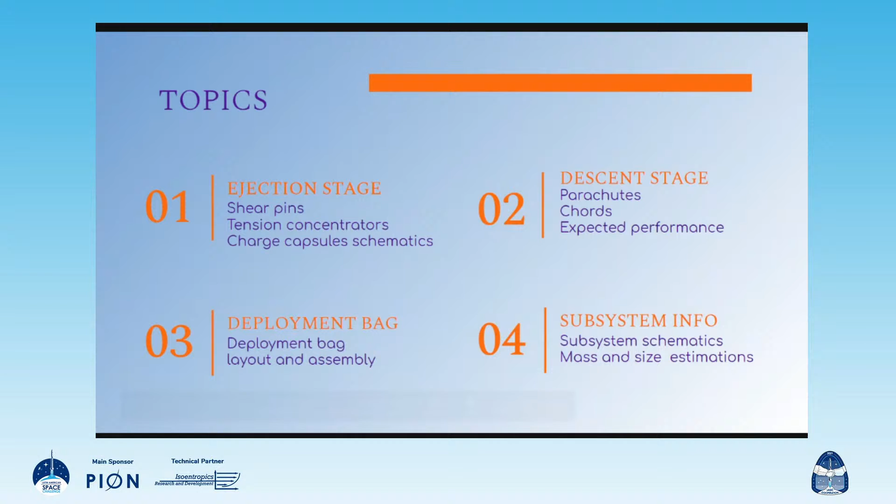I'll be presenting now the work from the recovery subsystem. During this presentation, we are going to take a look at the ejection stage and the sectioning of the rocket, and the descent stage. We're going to see the parachutes and the cords and the expected performance during descent, and some details about the deployment bag we're going to use for the parachute, its layout and assembly, how it's going to work, and some general subsystem information and estimations.

First, for the ejection stage, the shear pins have been dimensioned considering how much force they need to withstand during flight. This is the admissible force that they would withstand for the shear pins placed in the nose cone and the shear pins placed in the propulsion coupler. For the nose cone, we have 5 shear pins of 4 millimeters diameter, giving us a safety factor of 1.73, and this demands a black powder charge of 6 grams to expel the nose cone.

For the propulsion coupler, we will use 4 shear pins of 4 millimeters diameter, giving us a safety factor of 2.22, and this demands a black powder charge of 11 grams for the second sectioning of the rocket.

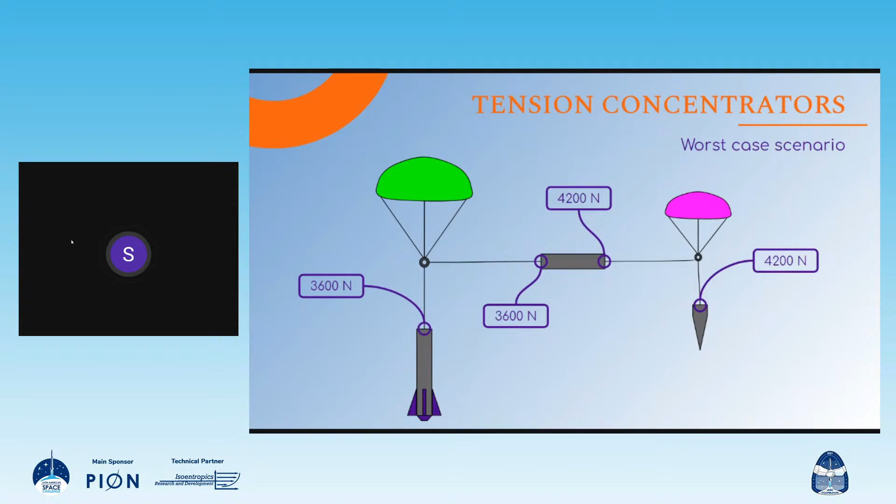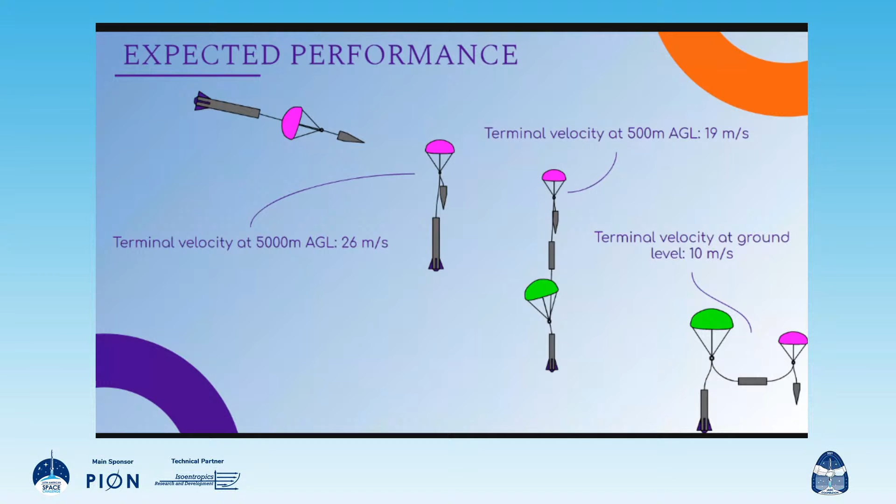This was designed to stand up to 50 kilograms of weight. And here you can see how the system behaves if we decrease the weight a little bit.

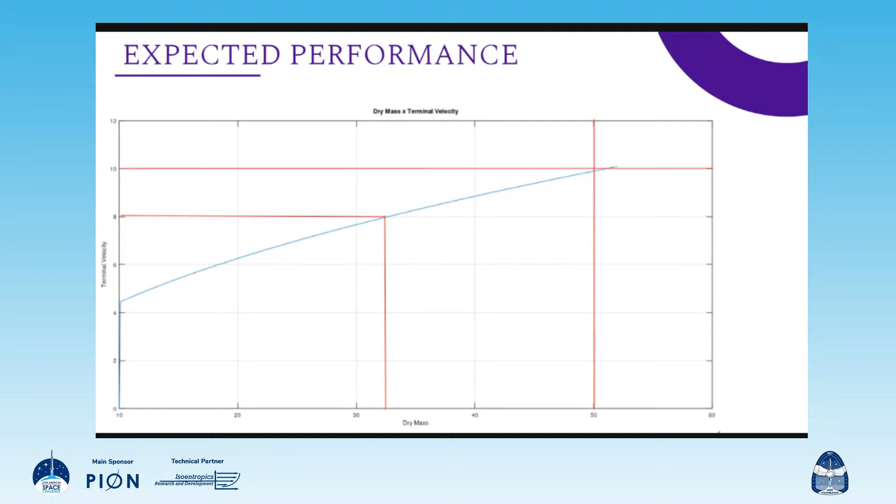So Structures is working on the mass optimization. And here you can see how the recovery subsystem would behave given this mass optimization.

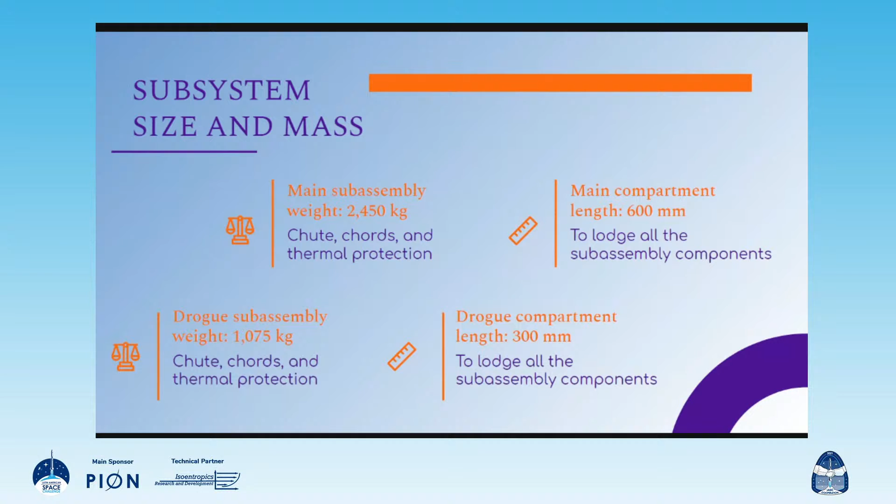These are the information that I have for today. Thank you very much.

Okay, thank you very much, Sarah. Okay guys, now Sarah, you present everything. Is it done? Yes. So now we have a few considerations from the last part. Am I good to go? We are good to go.

So you have a complete subsystem with every part that we wanted to put inside our rocket. The drogue, the main parachute, we have a mid section where the avionics for the recovery system will be placed.

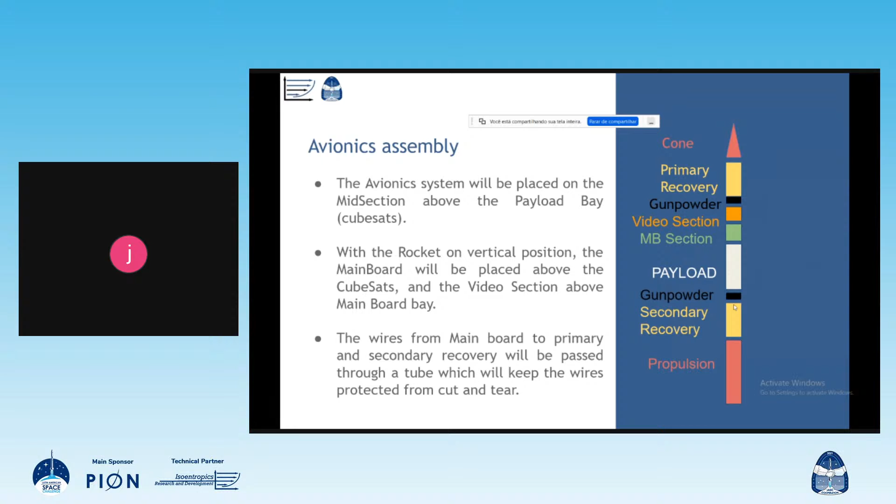I will start by presenting where the avionics will be placed on the rocket. So from ground to top, we have the engine in the beginning. After that, we have the recovery, the gunpowder charge, and the midsection. In the midsection, you have the payload bay, and after the payload bay, the main board section and the video section, which is our system. Above us, we have the other gunpowder charge to trigger the drogue recovery, and after that the cone.

We are responsible for triggering both recoveries, and to do that we will have wires from our bay to the bottom and upper part of the rocket to trigger the gunpowder charges. Here we have the design of how the rocket looks, and here in transparent material are the midsection, and here the avionics bay. Now, in this picture, we can see the avionics bay with more details.

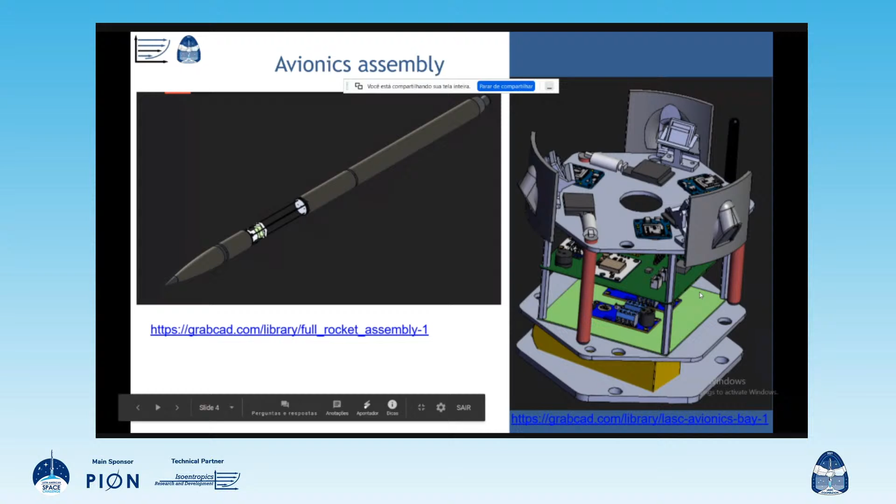In the upper plate, we have the video recording section responsible for recording and broadcasting live video from the rocket. In the middle of the avionics bay, we have the main board section with all the sensors and transmitter modules, and the recovery trigger below the main board. Below everything, we have our batteries to power the system and allow it to complete the missions.

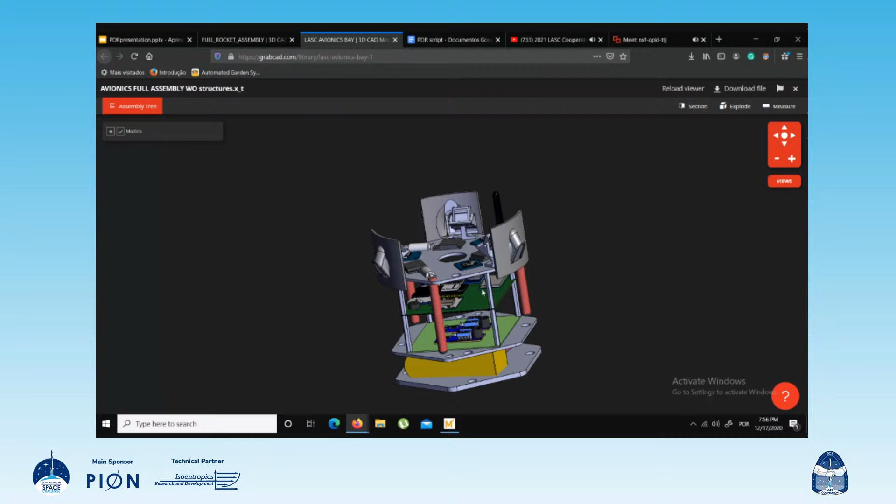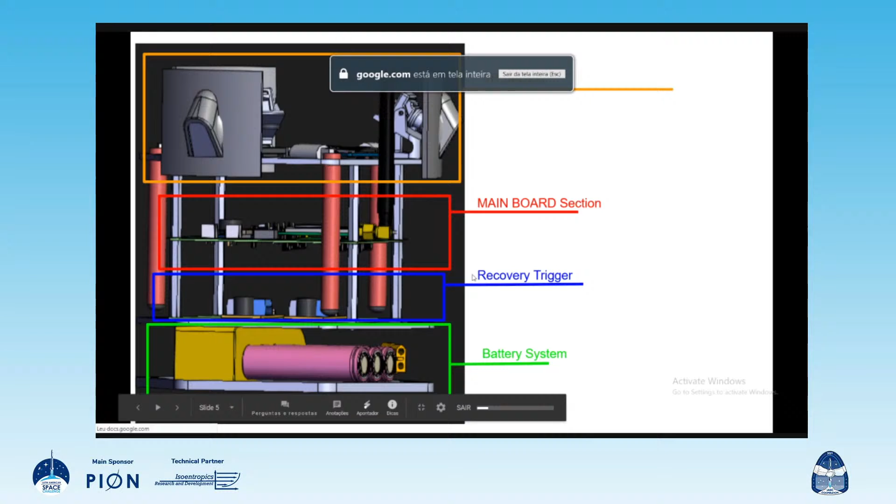This is Roberto. On this slide, we can see the main elements of the video record section, and I will describe each one.

At the right top, we can see the FPV camera responsible for capturing images in HD quality. Below it, we have the DVR device responsible for recording the captured images and converting them to analog format.

At bottom left, we have the omnidirectional antenna, responsible for connecting to the receiver at the ground station. Above it, we have a camera cover responsible for mechanical and thermal protection of the camera.

And finally, at the upper left corner, we have the FPV transmitter, which will operate at 5.8 gigahertz, sending all the images to the receiver at the ground station.

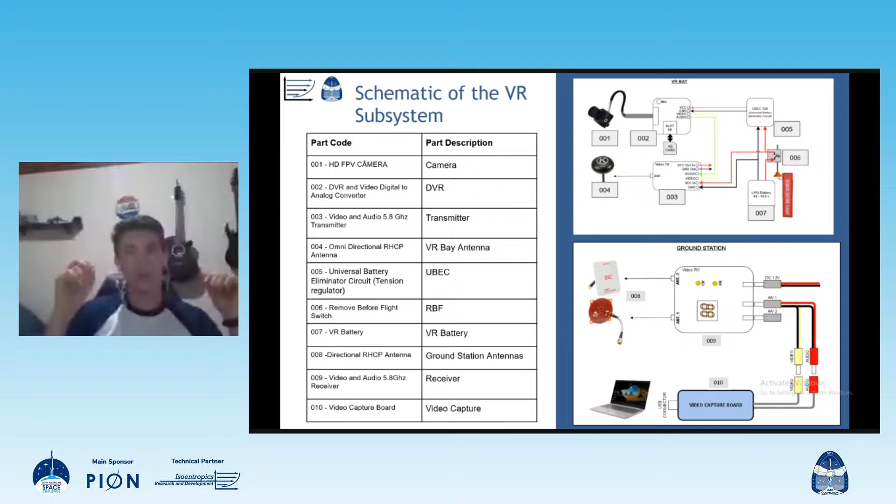And the camera will be connected to this DVR, so we can convert the signal from digital to analog, and also save the video on an SD card.

There will be also the transmitter, which will take the video from this board and use the antenna to send it to the ground station.

In the ground station, we have 2 antennas, one directional and one omnidirectional, and a video receiver responsible for receiving the video, connecting this receiver to a video capture board, and connecting the capture board to a computer. We are able to livestream our flight to the world on YouTube.

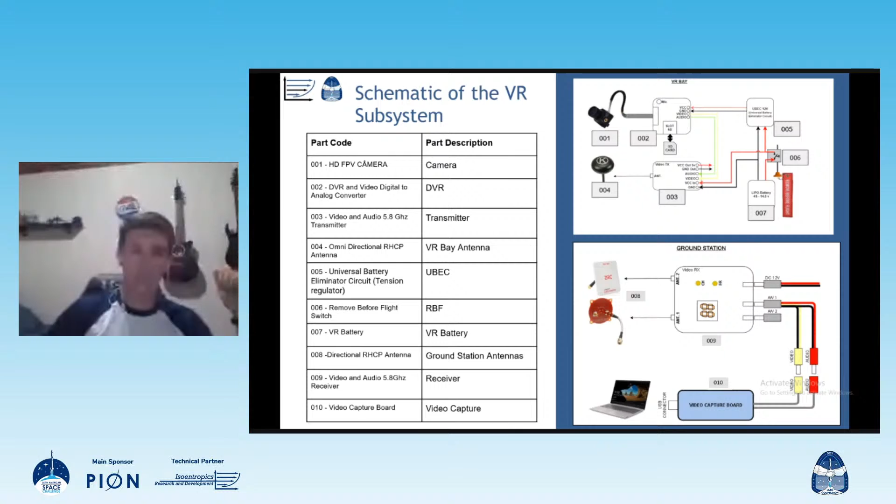So with that, we are able to see the ground and the horizon line during the entire flight. This is all I had to say. Thank you for listening.

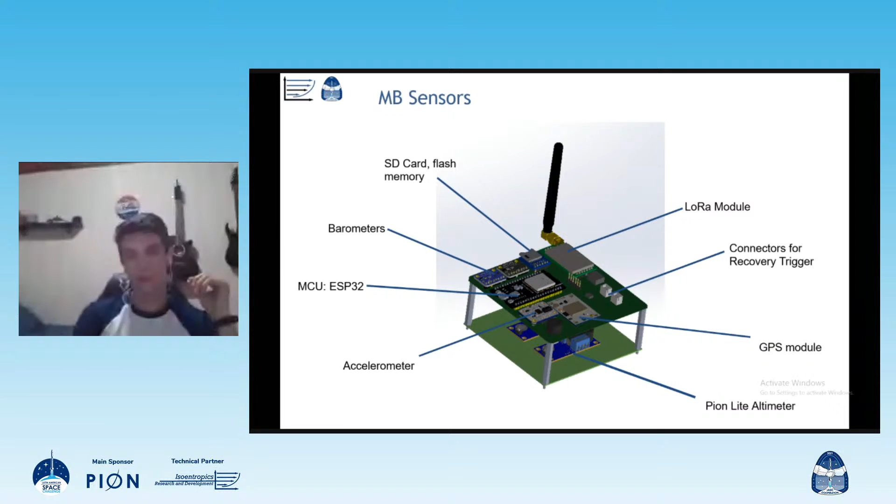Good evening. Now let's talk about the main board sensors and how the sensors are distributed on the board. In the image, we have a 3D representation of how the sensors will look on the plate.

On the first floor, we have the Pion altimeter, and on the second floor we have all the components chosen for the main board.

Something important to say is about the distribution of the components. This importance depends on the functions. For example, the radio LoRa module is in the corner because of the antenna, and the connections for the recovery trigger are also in the corner because they go outside the plate.

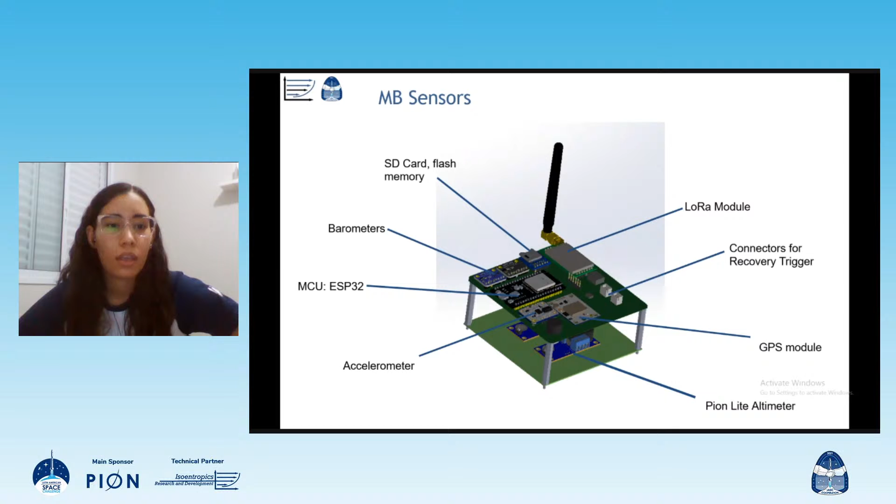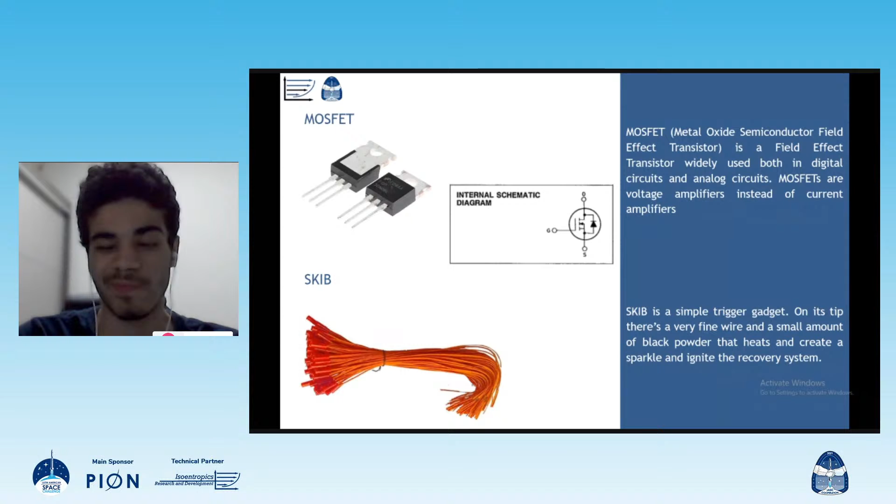The MOSFET is a transistor, a field effect transistor, different from the BJTs. The BJTs are current boosters, while the MOSFETs are voltage enhancers, voltage amplifiers. It works when you apply a voltage signal in the gate. There's the gate, the drain, and the source. When you apply voltage in the gate bigger than the threshold, it works like a closed switch between drain and source, so current can go through and apply voltage between drain and source.

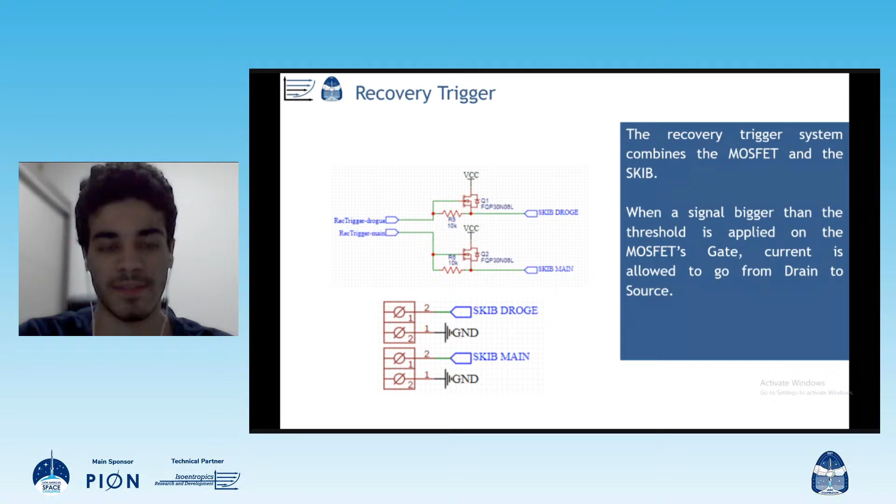Another image is from the connectors. We have the SKIB drogue and the SKIB main connected to the ground, which is where we'll connect the SKIBs that go to the recovery system. Now I'll pass it, you can pass the slide, and Lucas will present.

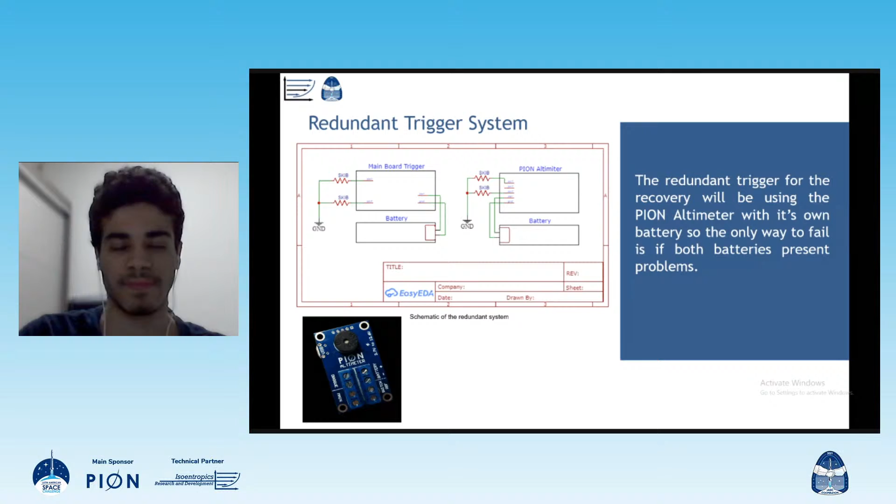As Rogério said, we have a redundant trigger system explained by this schematic on screen. Basically, we have a separate battery and a separate everything from the main trigger. So if anything fails in the main trigger, we have a separate one working as the redundant one. So we're basically sure it will trigger when the time comes.

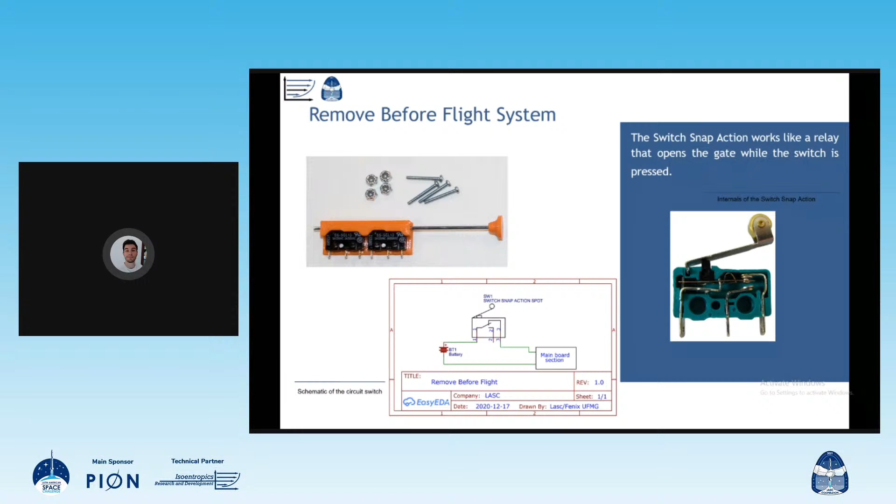Now we have Rodrigo with the next part. Good night everyone, I will talk a bit about the operation we'll do on the day of the launch. About the video, the first thing, when we are ready to go, we will take off the remove before flight key, and then the system will start to capture video and transmit data to the ground station. It will continue like this through the whole flight and during the recovery, and we will only turn off if the battery ends, or if we recover it before the battery ends.

You can pass the slide.

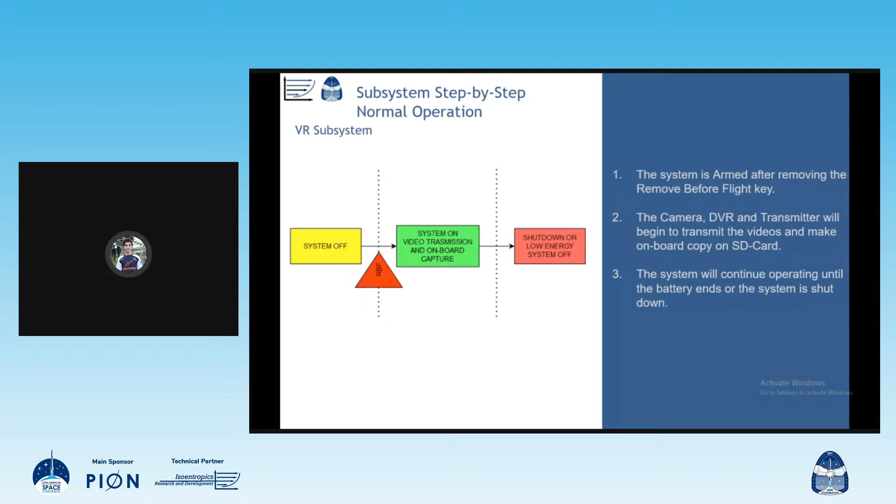Okay, about the main board, it's a little bit more complicated, but it's simple. The first thing, during the integration part, we will turn the system on, and the system will automatically check the sensors, meaning it will read the sensor data and check if it's plausible. It will create an SD file and write and read data to check if it's okay.

The GPS will be sending data if it's working properly. It will be sending data by the LoRa. And yes, we can check LoRa, checking if we are receiving data.

Okay, that's during the integration part. On the launch pad, when we are ready to go, until then the system will be in a low consumption mode to save battery. But when we are ready to go, we will remove the remove-before-flight key, and then the system will be on, which means it will be transmitting altitude, deceleration, and other flight data, and it will be checking for liftoff.

And from this point on, it's fully autonomous. After flight, the system continues on, but it's not checking for apogee or things like that. It will only be sending GPS position to help the recovery. And when we find the rocket, we will shut it down.

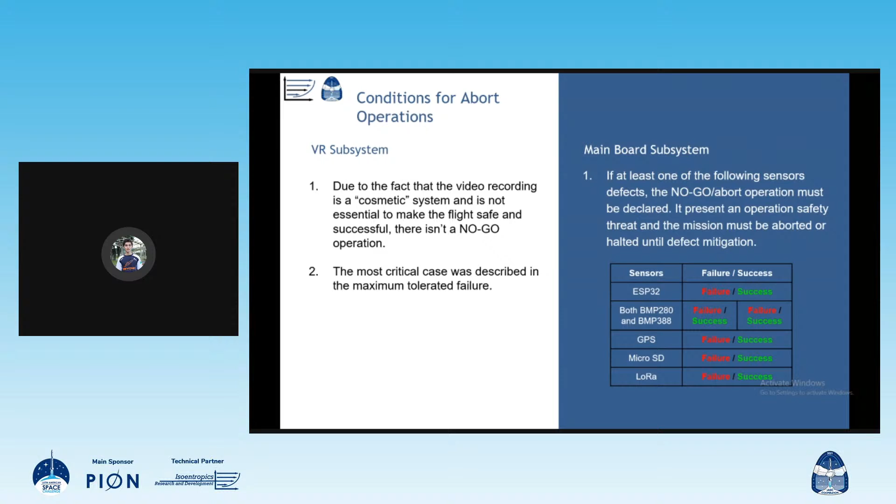And now I will pass the words to João. He will conclude the presentation.

Thanks. Okay, thank you, Rodrigo. Thank you all for presenting. That was our avionics system, the job that we developed during the PDR phase. And now we are open for questions. Thank you all.

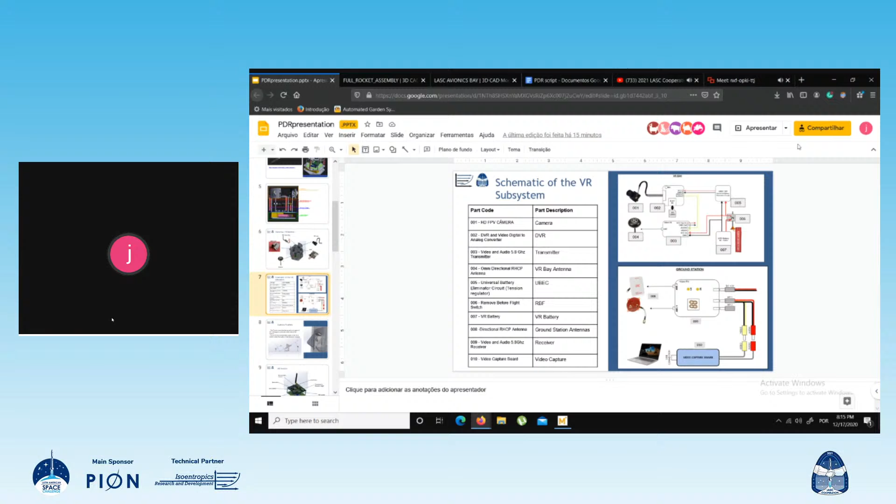About the antennas: on the rocket we'll use omnidirectional antennas. For LoRa on the ground station as well, we made some link budget simulations, and we believe the omnidirectional antennas can handle the data transmission with no problem. But regarding the video, we will assemble omnidirectional antennas on the rocket, while on the ground station, as you can see in that image, we will have a directional antenna that will track the rocket during the flight.

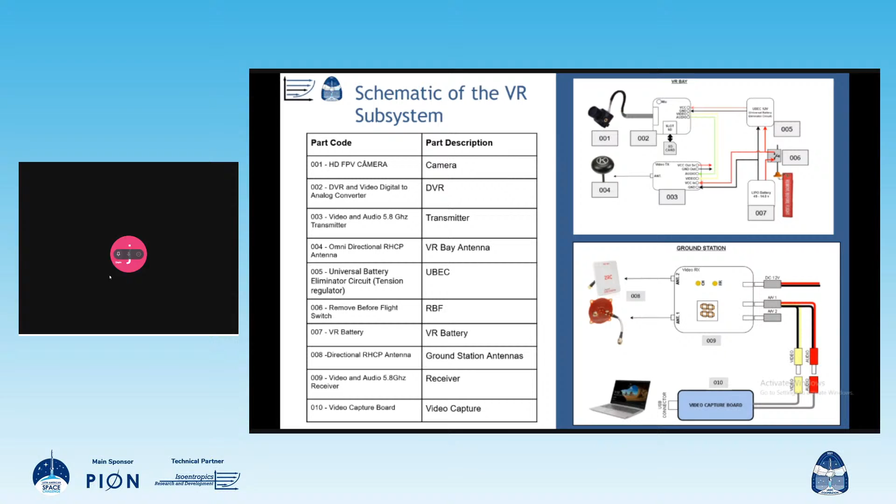Okay, that's really great. This slide you're showing right here really resumes everything of the avionics subsystem, and I think you did a great job here. There's a lot of information about where something is going to be plugged in and everything else. And just one other consideration I have: on this system, you are basically using the remove-before-flight on the batteries, right?

So you can unplug the battery from, when you remove the remove-before-flight system, the system will start to work, will be powered up. The antenna part you already covered. So the other thing is, it will be better for the recovery part of the system to be like this.

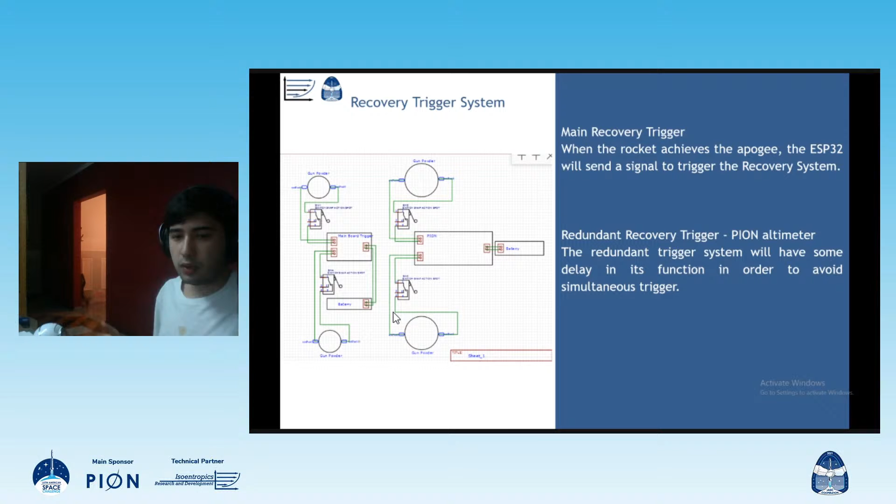One could criticize saying, oh, but in this way you are disconnecting the pyrotechnical charge, and you're right, you are really disconnecting, but the system behind it is energized and could do some damage as well while carrying the rocket from place to place. I think it's better if you do something on the battery as well. But you guys weren't wrong.

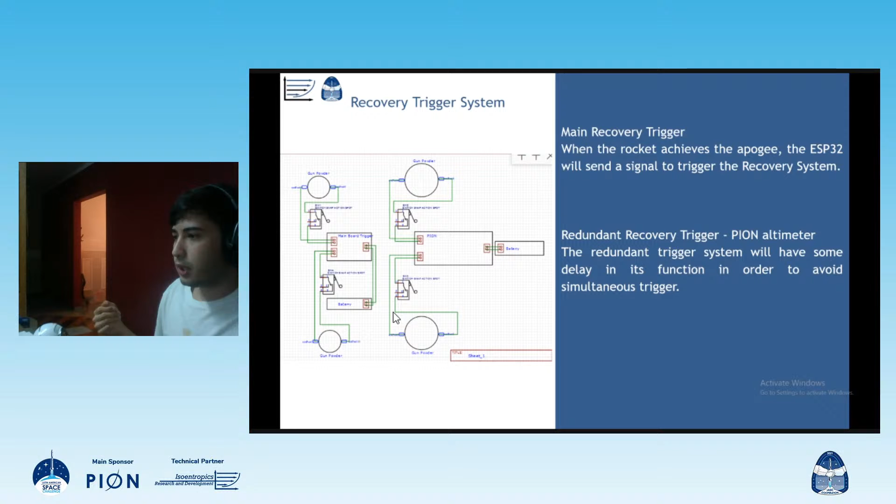It's just that it's more commonly used in rocketry to cut the battery, really unplug the battery from the system. That's the behavior of all the recovery boards, like the PION altimeter, the Stratologger, and other altimeters out there. They really cut the connection between the battery and the other parts of the system, so the system is only powered up when it's in vertical position or something like that.

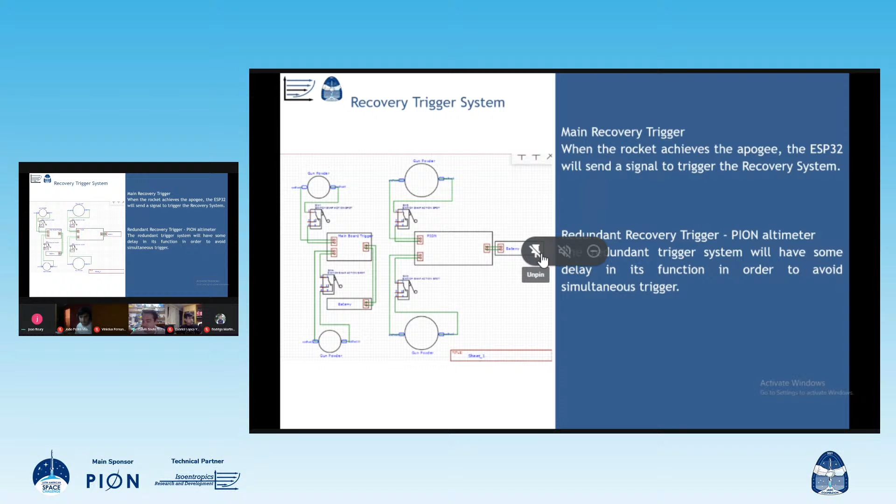And that's it, the other parts are really great. The main board and the battery there, you did a really great job. And yeah, that's really it. Okay, thank you João Pedro for your advice, for your comments. Thank you João for your presentation, for all the team responsible for the recovery system.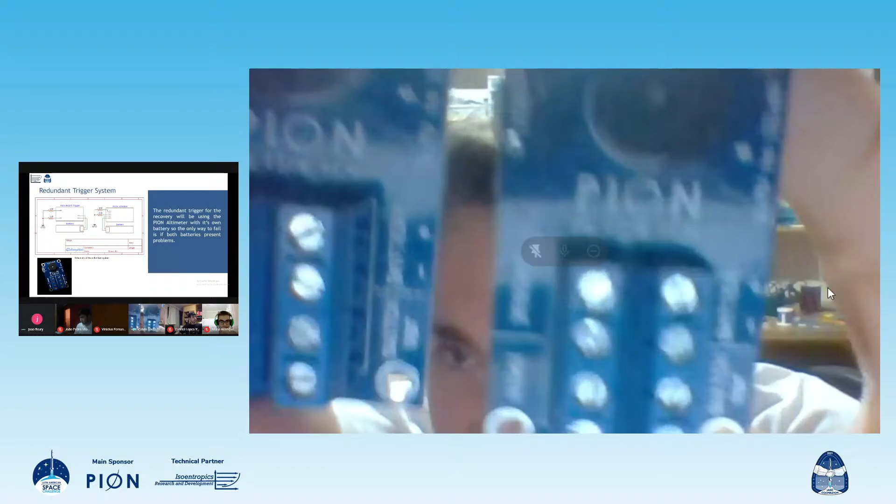I just want to show, I think you guys are working with the PION altimeter, and you guys need to see that. Okay, let me see, we have the PION altimeters here. So probably this is the first time you guys are seeing, we have a lot of altimeters here. So next, you guys will receive this for the project.

Okay, so thank you so much for the presentation. I really liked all the systems, and also I'm very anxious to watch the rocket going through the 5-kilometer apogee with a live stream from the onboard camera. So thank you so much.

That's it, guys, do you have any more words? No comment, that's from my side. Okay Vini, the word is yours.

Let's go to the next system. Congratulations with Avionics, you guys are go for the critical design review in 2021. One step closer.

Okay, thank you very much Calvin. Thank you all. Thank you very much João, and the team. This was a very nice and complete job, as you saw. A lot of engineering going into that.

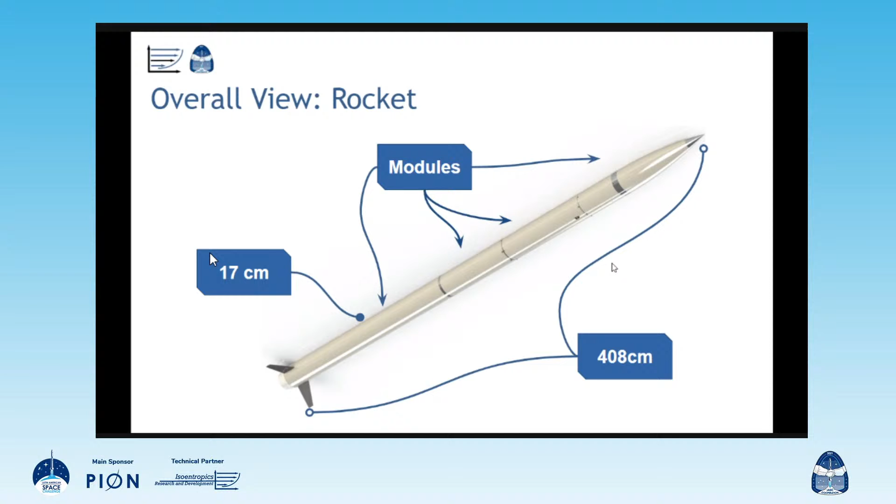To be a little bit more specific, we have 5 modules. The first one is the nose cone, then the drogue section, then the mid section, in which we'll be placing the avionics and the payload, then the main chute section, and finally the motor section.

Now we're going to talk a little bit more about the aerodynamics part of our subsystem. And to tell you guys a little bit more about this, I'm going to call Rafael.

Good night, everyone. I'm Rafael, part of the aerodynamics team for the cooperation program. Let's start our analysis with the expected flight profile for this rocket.

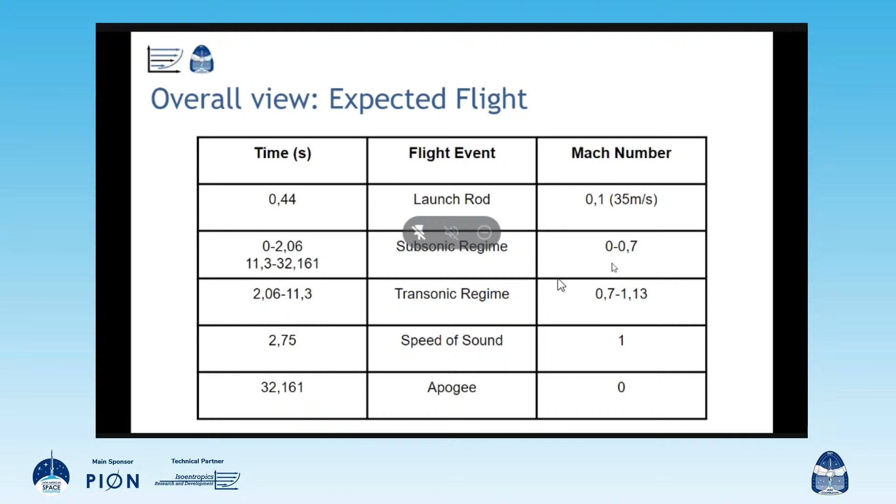This is a table with the main events of the flight. We start with the launch rod exit at about 0.44 seconds into flight, followed by subsonic flight, which will last for about 23 seconds, including the acceleration and deceleration periods. The transonic regime will last for about 9 seconds, and Mach 1 will be achieved during this period. The maximum velocity will be Mach 1.13 at about 3.7 seconds into flight, and apogee is expected at 32.1 seconds into flight.

Next slide, please. For the optimization of the aerodynamic components, we used genetic algorithms, which is a simple way to optimize designs without having a heavy computational cost.

The cost functions of this algorithm take into account drag, weight, and stability. The algorithm changes the dimensions of the components, excluding the configurations that are unstable, and it tries to minimize the drag and weight of the components. The results of this optimization will be shown next. Now, with the nose cone team.

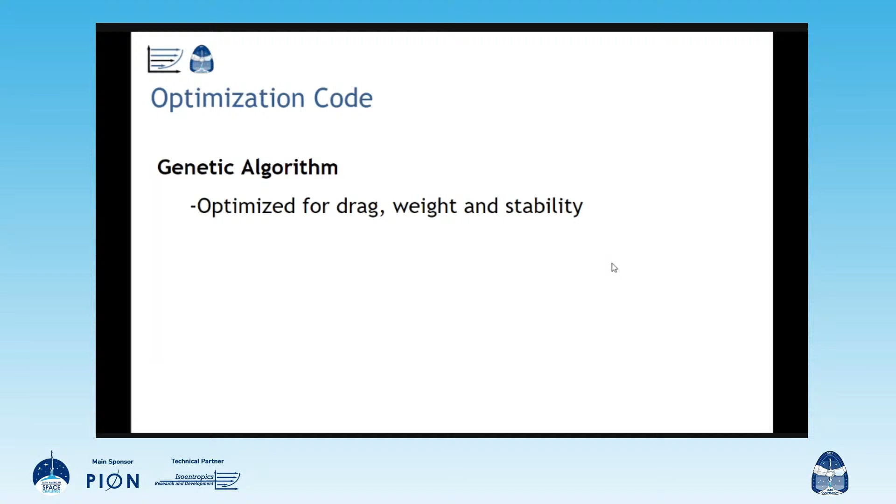Good night, everyone. About the CFD simulations we made, the objective was to verify the most optimized geometry that would generate the lowest drag coefficient for the cone and the boat tail, because doing the calculations for each case would be very complex. So with the help of the software, more accurate values could be obtained.

Basically, we defined several geometry configurations for both, to be calculated at different Mach speeds. These configurations were implemented to simulate the flight of the rocket.

Starting with the nose simulation, several aspect ratios were generated to verify the influence of the elongations on the drag coefficient. From the results, we can see that during subsonic flight, the frictional and pressure drag are very influential. From the transonic flight at Mach 0.9, there are parts of the cone that are speeding above Mach 1, thereby generating drag due to wave shocks. Thus, from the transonic to supersonic flight, the wave drag is more influential than the others, concluding that a larger aspect ratio is more advantageous. So the cone simulations generated a lot of data for the optimization scope.

The L over D configuration equal to 4 ended up being chosen due to the small variations in the drag coefficient during the flight, besides other factors.

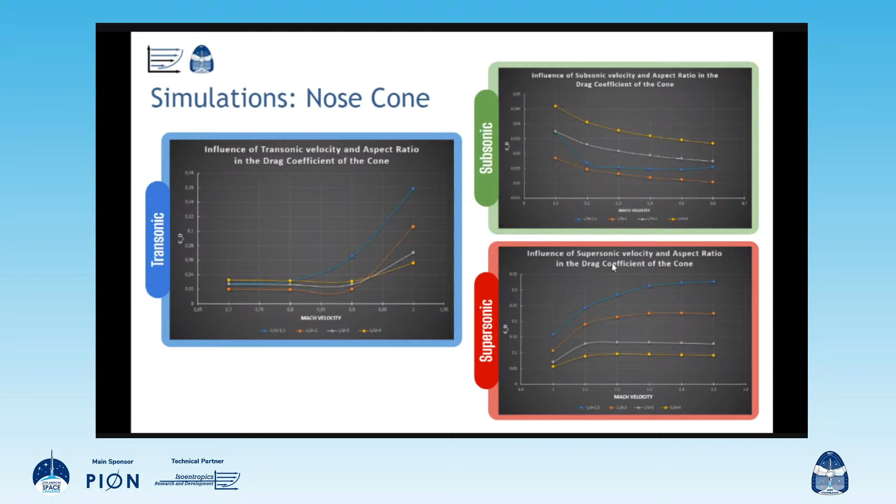Here is the detailed behavior of the CD for the subsonic, transonic, and supersonic flight, as I had explained before. Now we're gonna explain the boat tail.

Just like we did for the nose cone, the boat tail simulations were made by varying the length and the angle through different Mach speeds.

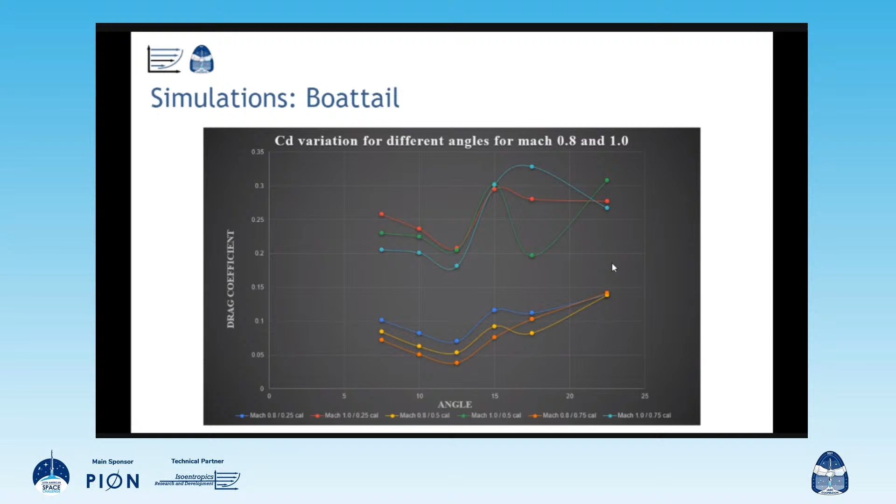To increase the structural strength of the fins, the material selected for its manufacture is carbon fiber sandwich with balsa wood, and the total maximum thickness of the component was set at 5 millimeters. As for stability, the set of 3 optimized fins provides a static margin of 1.7 at the moment the vehicle leaves the launch rail.

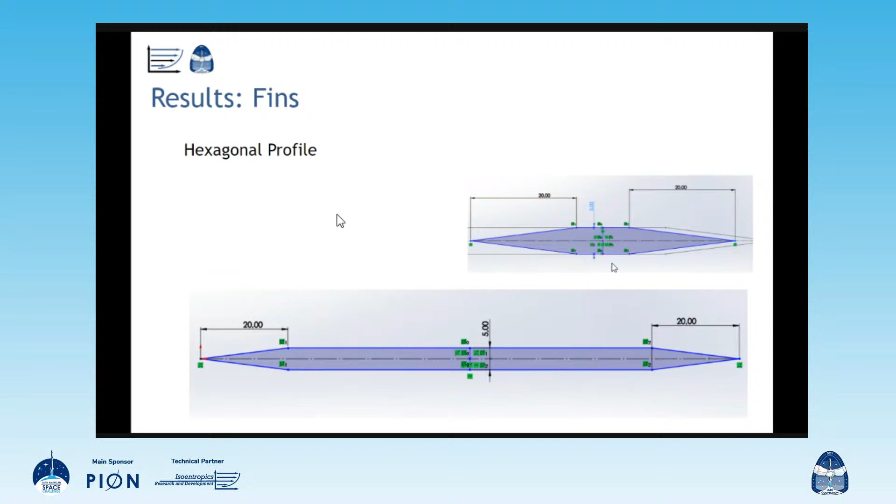This is the preliminary design of the fin profile. The hexagonal profile was chosen to decrease shock wave formation, avoiding stability loss and decreasing wave drag. The dimensions were chosen to enable the manufacturing process, avoiding small angles and dimensions, while also providing high aerodynamic efficiency.

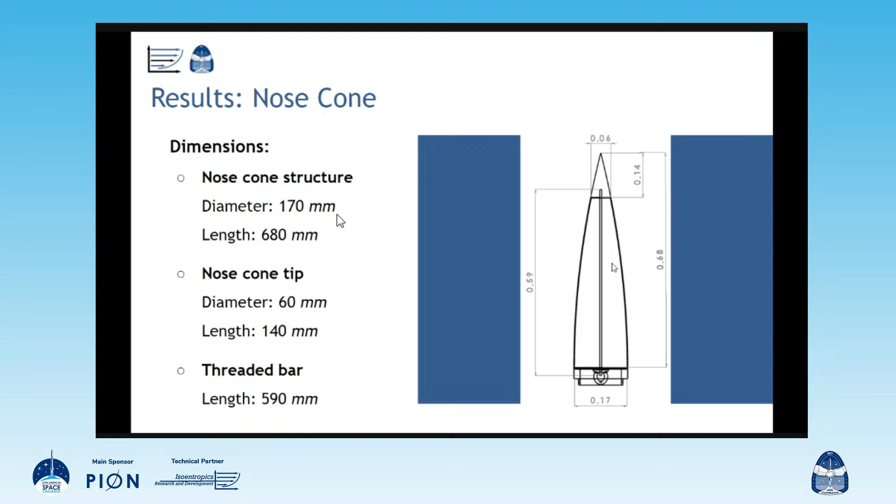Now, talking about the dimensions of the nose cone: we have 170 millimeters in diameter and 680 millimeters in length for the general structure, 60 millimeters in diameter and 140 millimeters for the tip, and finally the threaded bar with 590 millimeters.

After completing the drag coefficient simulations for the boat tail for different lengths and angles, and applying the values into our optimization code, we obtained the optimized geometry for the boat tail: a truncated cone with a length of 0.5 calibers and an angle of 11.9 degrees.

After some thermal analysis and as a means of weight saving, it was decided that the boat tail should be made of PLA filament by 3D printing because of its cost-benefit ratio. Besides that, it was determined that the boat tail would be fixed to the rocket by the motor screws through some attachment points made on the boat tail attachment zone, which is the thinner part at the bottom in this image.

Even though the thermal analysis of the nozzle did not get ready, research was done on the different possible thermal insulators which could be used in case the temperature around the nozzle gets higher than what the filament can resist without deforming.

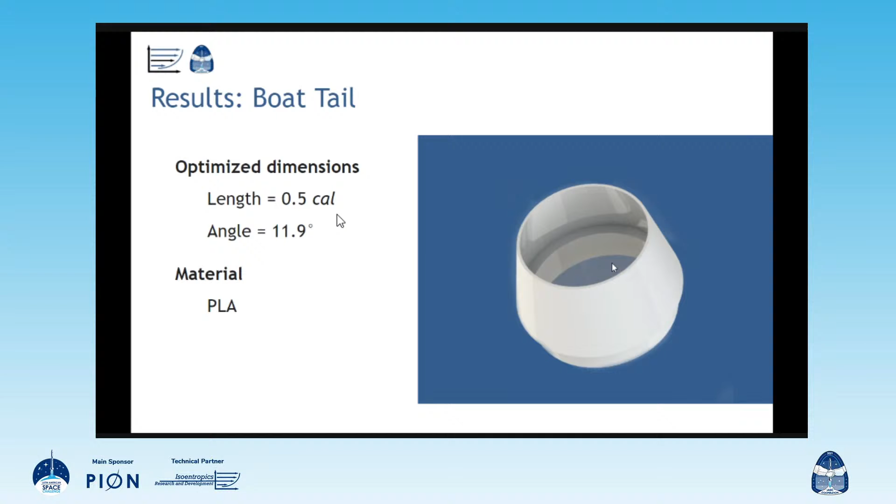Now we're going to go to the second part of our presentation, which is more related to the structures part of our subsystem.

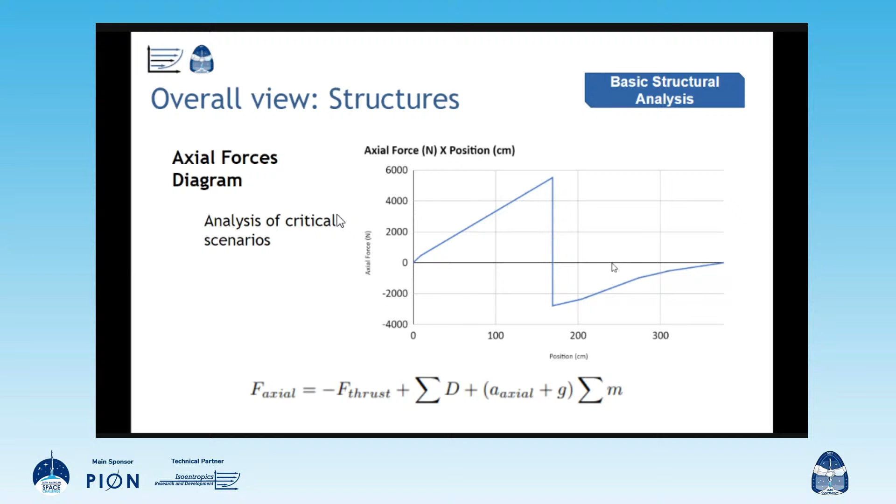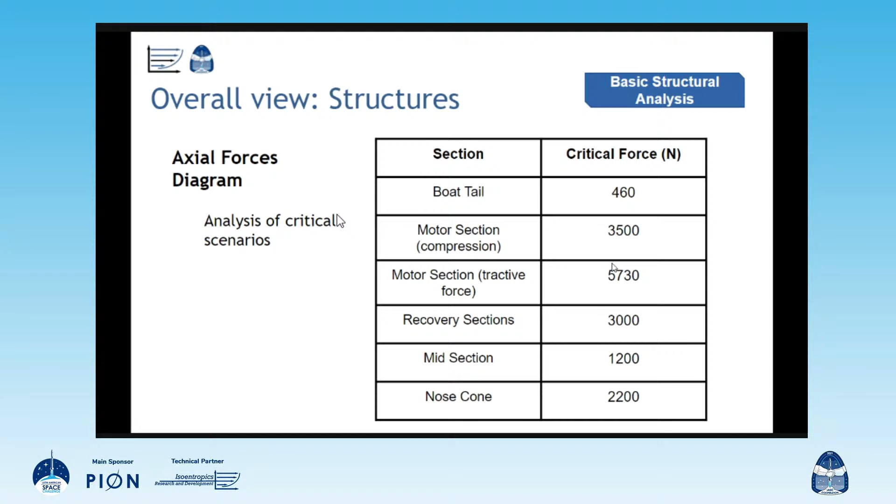First of all, the first thing we did for the PDR was to make these basic force diagrams that you're seeing now. This first one is the axial force diagram. It considered the effect of the aerodynamic axial force, which is kind of like drag, the weight of the structure, the inertial force created by the acceleration, and the thrust produced by the motor. A number of critical scenarios were considered, resulting in the following maximum values for each section. Here you have the critical force that we found regarding the axial force.

Then we analyzed the normal forces acting over the rocket, which are the normal aerodynamic force and the decomposed weight in some cases.

In our case, we consider a scenario in which the rocket will be submitted to a velocity of 400 meters per second, an angle of attack of 5 degrees, and a decomposed weight considering a launch angle of 5 degrees as well. That resulted in the following results.

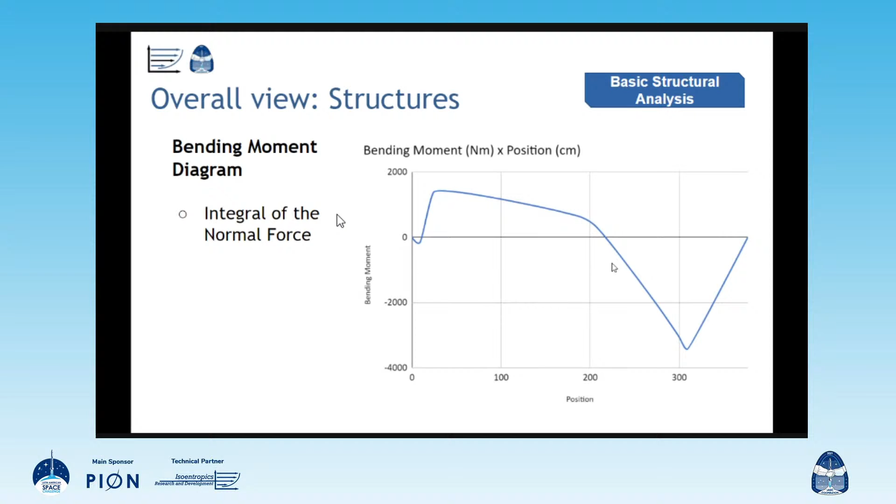With this data, we were able to perform a number of tension analyses, and after that, we were able to settle the dimensions and the materials. Other important loads applied to the rocket's structure are the inflation loads and the pressure vessel loads, and we also did some thermal analysis.

Now, Lucas Sauer will tell us a little bit more about the coupling system.

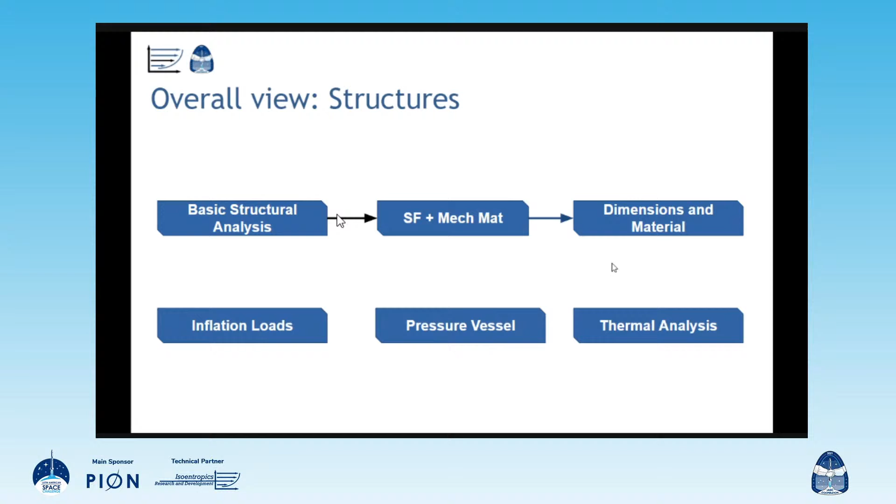Good evening, guys. Talking now about the coupling system. From the SDR to the PDR, many changes have happened. Some of them regard the internal structure of the rocket, and others relate to propulsion.

We can say about the bulkhead of the motor that it will not be the same way as it was supposed to be in the SDR. Now it is attached both to the coupler and the fuselage. The male-female system was kept in order to ease the assembly and integration of the rocket.

With the design defined, we started the analytical calculations considering the forces and loads that Augusto has just told us about, and the yield strength limit of the material we chose, along with the areas we've got. The material defined was aluminum alloy 6351-T6, which has similar properties to aluminum alloy 6061-T6, a widely used material in the rocket industry.

With the material and dimensions enhanced, we could set the mass with software help, and it was about 1,400 grams, which was inside the expected range for the couplers. Simulations are about to be done, finite element analysis that will have to match with the analytical calculations to see the internal efforts.

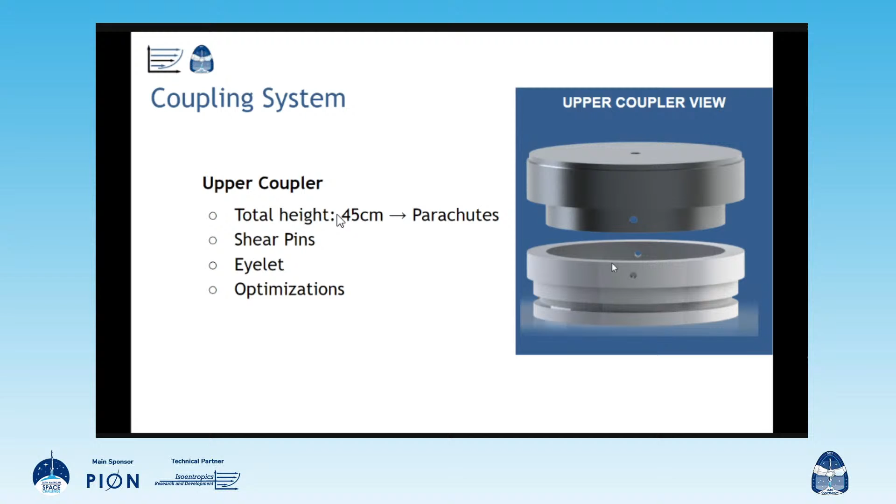Its total height is about 45 centimeters. It must have the parachutes in its space. It also has some shear pins for the recovery, and a place for putting an eyelet that holds the parachute. Optimizations were done considering its attachment with the nose cone.

Talking about the mid-section drag coupler, it will connect the mid-section of the rocket to the drag section. It was designed to sustain an inflation load of 4,000 newtons, and like the others presented, it will be made out of aluminum 6351-T6.

It has holes for the threaded rods of the middle section, which will be presented soon. The recovery uses an eye-bolt and powder capsules attached to it. To make assembly easier and more versatile, it was decided to use M6 screws to attach it to the fuselage.

Additionally, we have the coupler that connects the middle section to the main chute section. It has basically the same design as the previous one; however, due to higher predicted inflation and pressure loads, it's thicker, and we will use M8 screws to attach it to the main chute body.

Now Rodrigo will be talking about the motor section of the rocket. You can go on, Rodrigo.

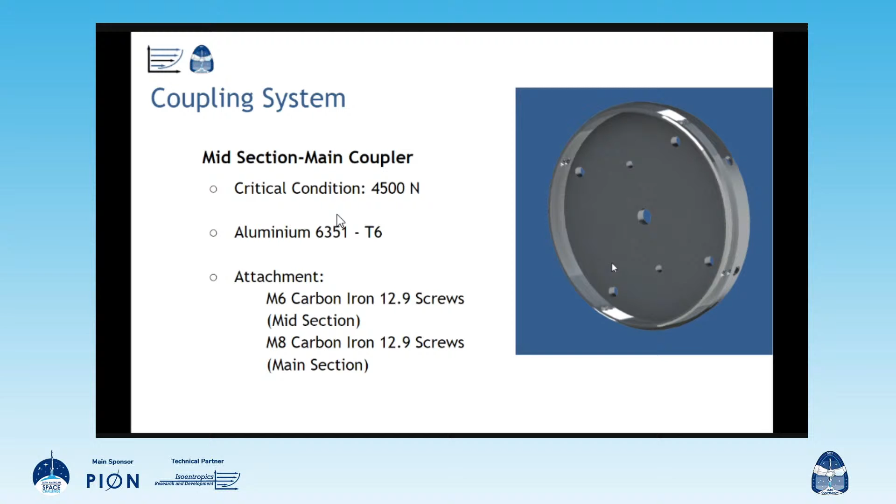Thank you. Good evening, everybody. Continuing the efforts made in the SDR, in the motor section, all the dimensions have been set for each subcomponent in this phase. For the fuselage, we decided to work with the following dimensions, as you can see in this slide.

1,650 millimeters for the length, 160 millimeters of diameter, and 3 millimeters of thickness. This component will be made by E-glass epoxy, and all the calculations were made by our team analytically. We adopt a safety factor of 2.12.

For the alignment rings, we use a material of nylon, and the length of the alignment rings is about 15 millimeters, and it has 140 millimeters of internal diameter and 10 millimeters of thickness.

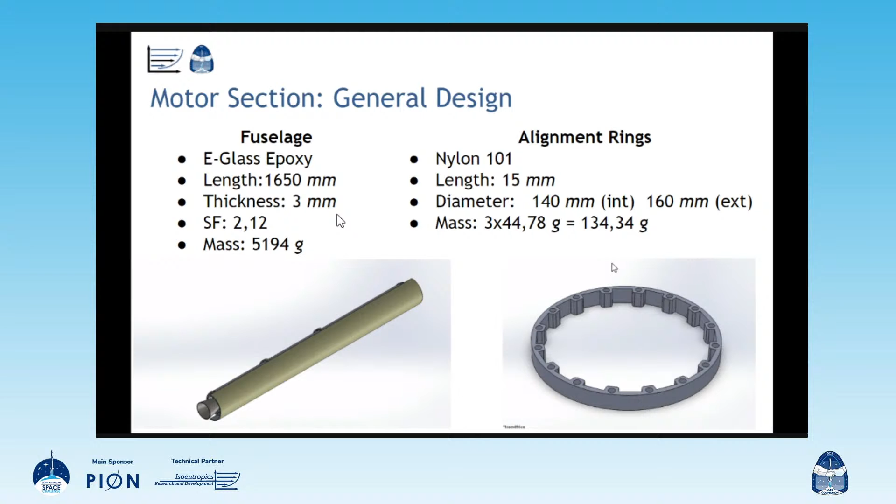The results showed us that we need to use three nylon alignment rings, and the temperature of contact will be around 100 degrees Celsius. I think now the recovery section teammates can go. Thank you.

Okay, so presenting the recovery. Since the SDR, there have been some changes in the design of the parachute's deployment, as you already saw in the recovery presentation. The current design places each parachute on the sides of the midsection, and the fuselage is also going to be the E-type fiberglass laminated with epoxy resin.

This design requires a fuselage thick enough to withstand the pressure of the parachute ejection, as well as all the other typical loads on the fuselage. As weight is a critical aspect of this design, we also wanted the tubes to be as lightweight as possible. So to solve this, we made a pressure vessel analysis on these tubes.

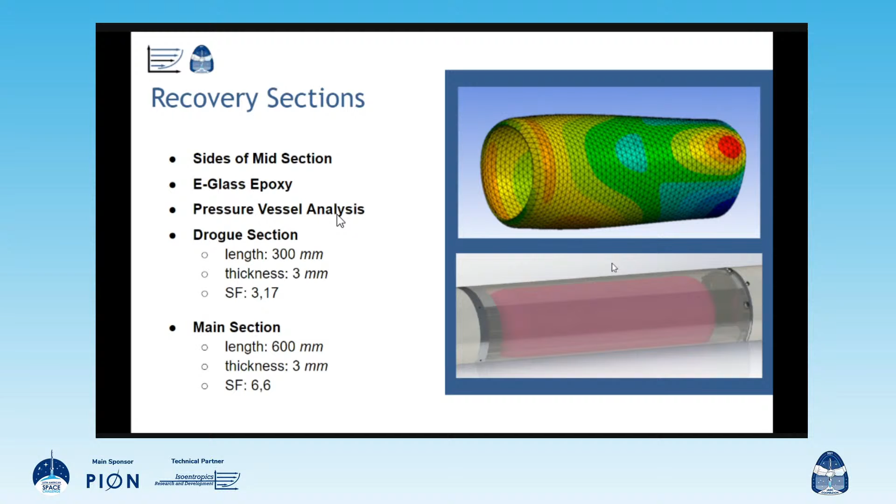Hello everyone, my name is Flavio. I'm going to talk more about the midsection. The middle section is where we're going to place the avionics and payload bays, and it's a section that had many requirements to take into consideration. This section needs an internal structure to provide extra relief to the fuselage, for more security to the internal equipment, and also to release the base from having structural holes.

So the design requirements are that the internal structure has to offer protection to the avionics and payload bay, as well as easy integration. So we focused our design to be simple, objective, lighter, and as modular as possible. Thanks to the real team effort, we tried and analyzed a few designs to reach this final one, which consists of 4 M8 threaded rods fixed to the recovery bulkheads by hexagonal flanged nuts.

These rods are made of AISI 1020 steel and are 720 millimeters long. With this, the payload and avionics base can be easily integrated into the structure, giving it simplicity and versatility, especially for the payload. The total structure mass is around 1,200 grams. With these technical features, we can conclude that the design meets all the requirements.

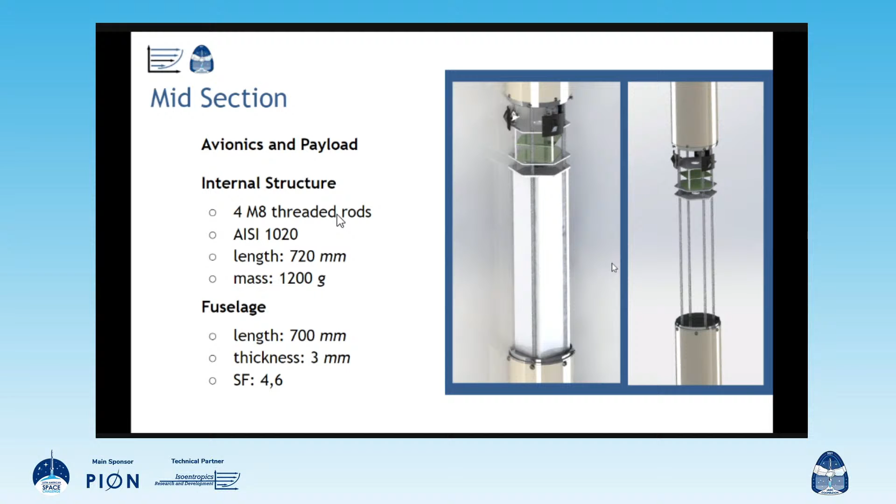For the fuselage of the section, it has a length of 700 millimeters with a 3 millimeter thickness, all with a safety factor of 4.6. Now I will return the word to Livia.

Okay, so the avionics bay has also changed since the SDR, as you already saw in the avionics presentation. It's now unified and inside the midsection, and the bay consists of an open stack structure of 3 aluminum plates where all the avionics components are placed, inside a length of 200 millimeters. For this design, we had to take into consideration the weight of the batteries, the height of the antennas, the passage of wires between components and the recovery, and also the precise positioning of the cameras.

Because of the batteries, which are the heaviest components, the inferior plate is defined with a thickness of 5 millimeters, while the other ones are defined with a thickness of 3 millimeters. The positioning of the cameras was a bit tricky because we have a structure of 4 rods, but we need to place 3 cameras equally spaced at 120 degrees. To ensure that the cameras are integrated correctly, we propose using hexagonal plates in which the cameras will be fixed on every other vertex.

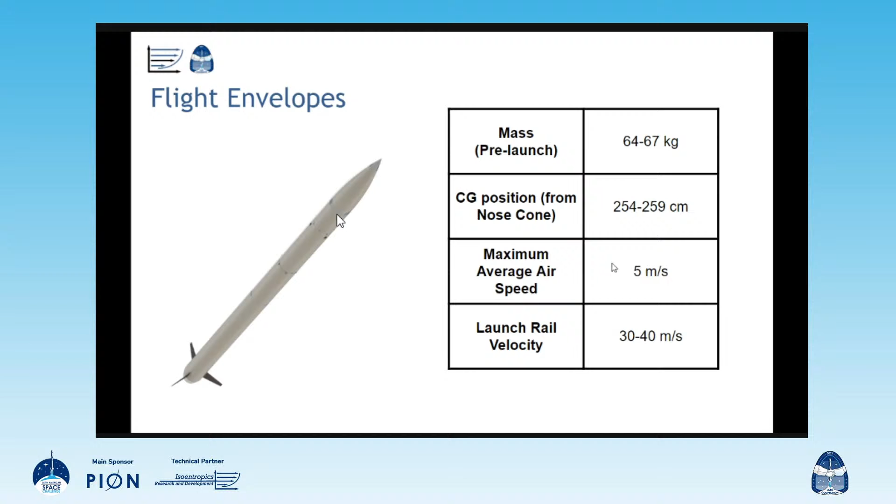If all these conditions are met, from our perspective, from the aerodynamics and structures perspective, we can assure that the rocket will perform a stable and safe flight. So that was our presentation. Thanks a lot, and do you have any questions?

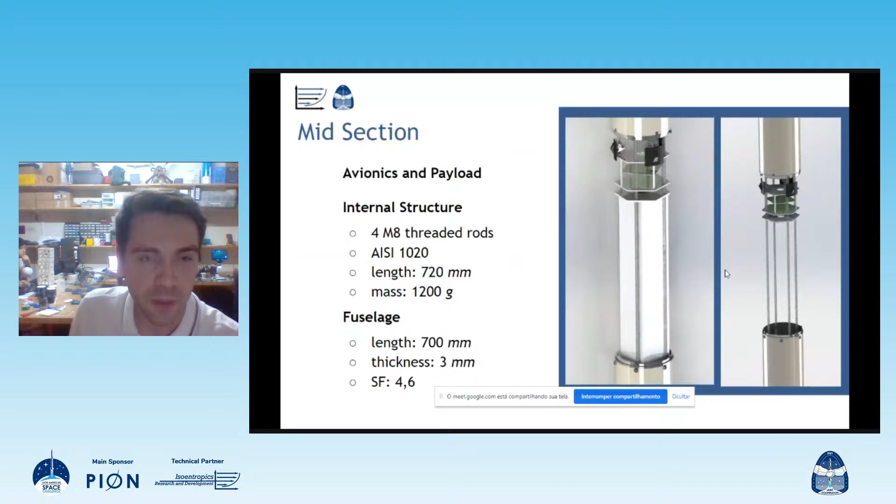Thanks, so I have just a question. If you can go back to the fuselage part, the engine section. Yes, motor section. My first question is, you are saying that the fuselage is made of E-glass epoxy with a length of 1.6 meters, a thickness of 3 millimeters, and a mass of 5 kilograms. Is that correct? 5 kilograms for 1.6 meters of 3 millimeter thickness of fuselage for the motor bay?

Yes, according to the CAD that we've done, we used an approximation because E-glass by itself has a density of about 2.5 kilograms per... I don't remember the exact value, but it's a little bit high, almost the same as aluminum. But the thing is, we are not using only E-glass. When we laminate, we also use epoxy, and this lowers the density of the composite material a bit.

So of course this is really difficult to measure when you don't actually have the material. But what we've done is get information from other teams that have already worked with the same fiberglass in the same way we're expecting to use it, and we got the density from them, then calculated the mass, and this is the mass we've got.

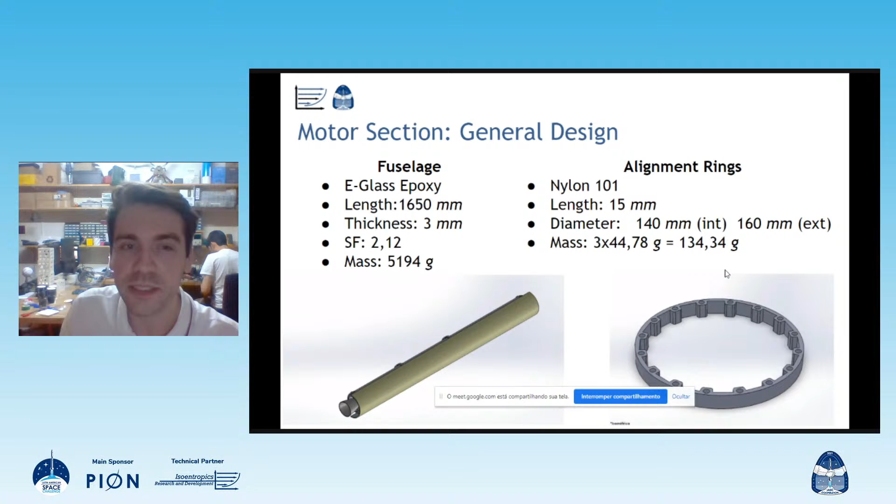Okay, fine, it's because a few years ago I saw something like that but with bars inside it. So okay, I don't need to worry about it, I think it's okay for this part. Could you go to the fins, please? To what, I'm sorry? The fins. Oh yeah, sure, of course.

With a supersonic regime, we need to worry about the transonic regime to the supersonic regime, about the aerodynamic effects. For example, you have a balsa, a plywood with a layer of carbon fiber. With the transonic regime and all the effects happening in that zone, we need a complete analysis of the aerodynamic effect.

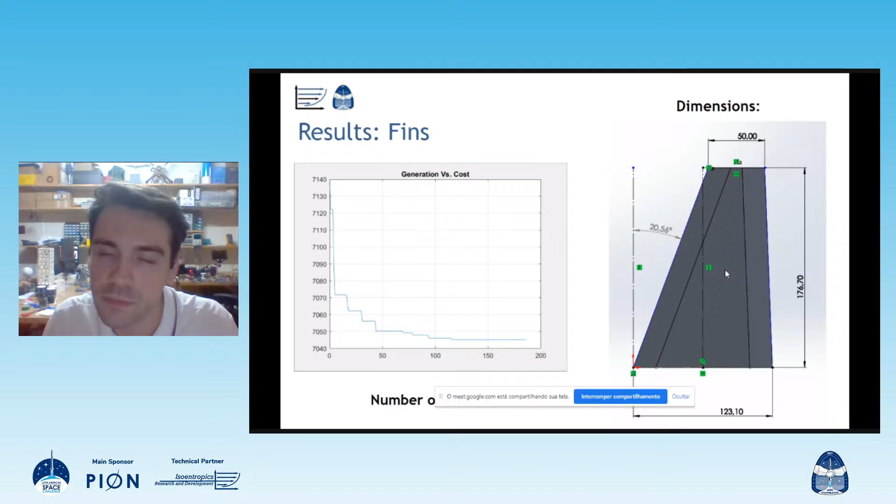As you can see, the aspect ratio of our design is kind of big as well. We ran a few simulations using AeroFinSim, and this is one of the reasons why we chose carbon fiber, to make sure the structure won't have any damage due to aeroelasticity effects. But yes, we are totally planning to tackle this topic during the CDR. Thanks a lot for the advice.

Do you guys know what is your max Q, the maximum dynamic pressure? I'm not sure, I think we didn't have time yet to do a full scale CFD analysis, so actually we don't have this information yet. No, it's okay, it's okay. Nice, congratulations guys, nice work.

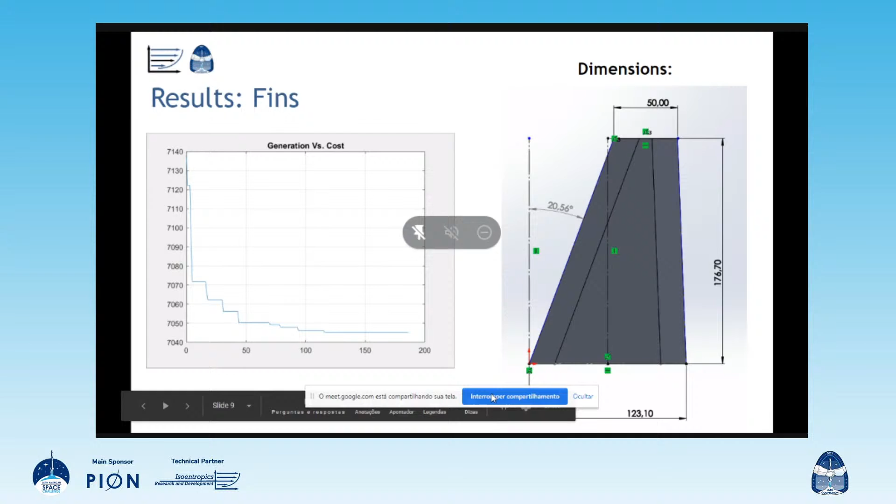So Vinicius, go on. Okay, thank you very much. Thank you very much, Augusto and team, it was a very nice presentation. I hope everyone enjoyed it a lot. And now let's go for the last part of the meeting, let's go for the propulsion...

We have Felipe and Igor, PMOs, and the propulsion team. They're going to present us what it takes to take a massive rocket like that into a 5-kilometer apogee. Now Felipe, can you hear me? Yes, I can hear you, Vinicius.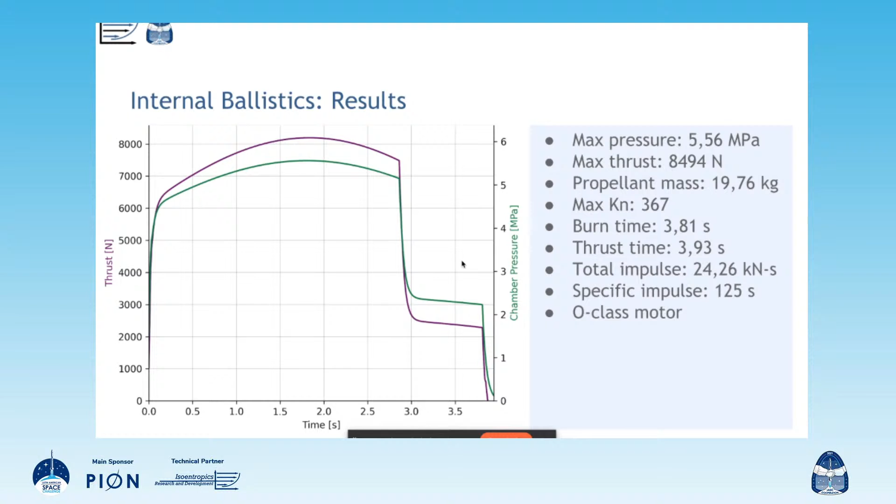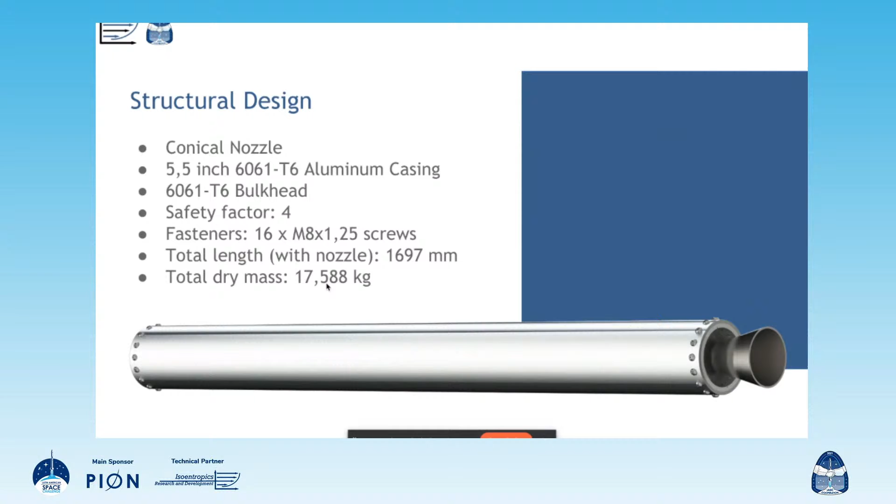We're working with a 5.5-inch 6061 T6 aluminum casing for our main architecture, a 6061 T6 bulkhead, a safety factor of 4, and 16 fasteners of M8 1.25 screws on each side of the parts. The total length of the motor is going to be almost 1.7 meters, and the total dry mass is 17.59 kilograms.

Here is more information about the casing. It's going to be made out of 6061 T6 aluminum—we've already confirmed with our supplier. The outer diameter is 139.7 millimeters or 5.5 inches, and the casing length is 1,588 millimeters, as said previously in the structures presentation.

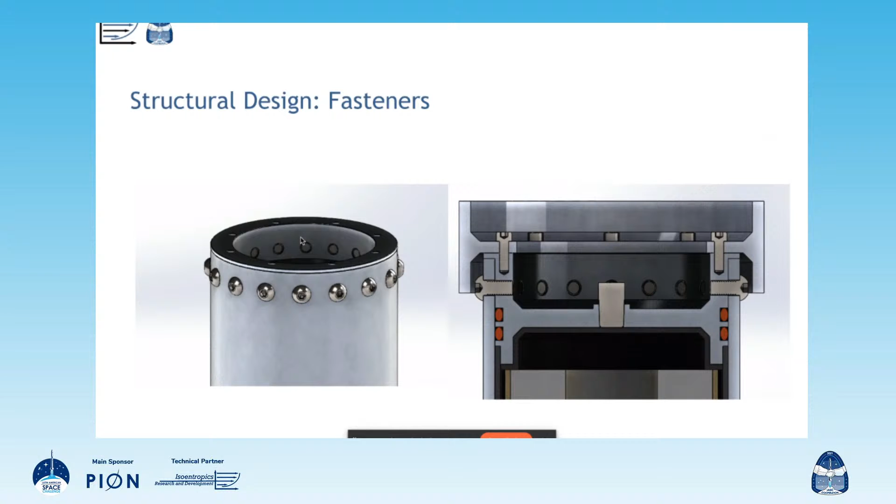For the fasteners, we decided to go with a 16 screw count, radial screws, equally spaced. They're going to be M8 screws, with threads of 8 millimeters outer diameter, and a thread pitch of 1.25 millimeters because it's the most common and generally pretty standard. This yields us a safety factor of around 5 or 6, depending on whether you're calculating for shear, compression, or tear.

More information about the bulkhead: we have 6061 T6 aluminum also, and the thickness is going to be 10.2 millimeters. This also yields us a safety factor of 4.

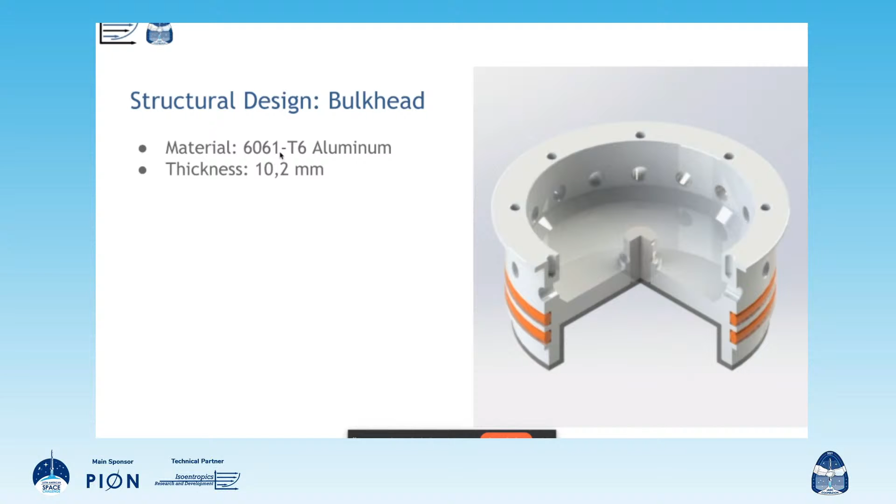So for the nozzle, we have a material, 304 stainless steel. This is pretty standard also for a nozzle. It is pretty heat resistant.

A conical profile, which is also pretty standard and pretty easy to manufacture, which is certainly a plus in this range of diameter. A throat diameter of 36 millimeters, expansion ratio of 8.67, which optimally expands through most of our operation.

This was actually optimized for max thrust. Convergent angle of 45 degrees and divergent angle of 15 degrees. The divergent angle might go down a bit on the CDR, but that is the current one which we got the max apogee of.

And now I'm going to pass to Andres. He's going to talk about the thermal analysis of the motor.

Good evening, everyone. My name is Andres. I'll be talking a little bit more about thermal analysis. As selected on SDR, the material used on thermal protection for this one is EPDM, as you can see on the presentation. So in order to estimate the thermal distribution along the case and also along the bulkhead motor, we developed a new software called Rocket Thermal Analysis, as you can see in the right-hand side image.

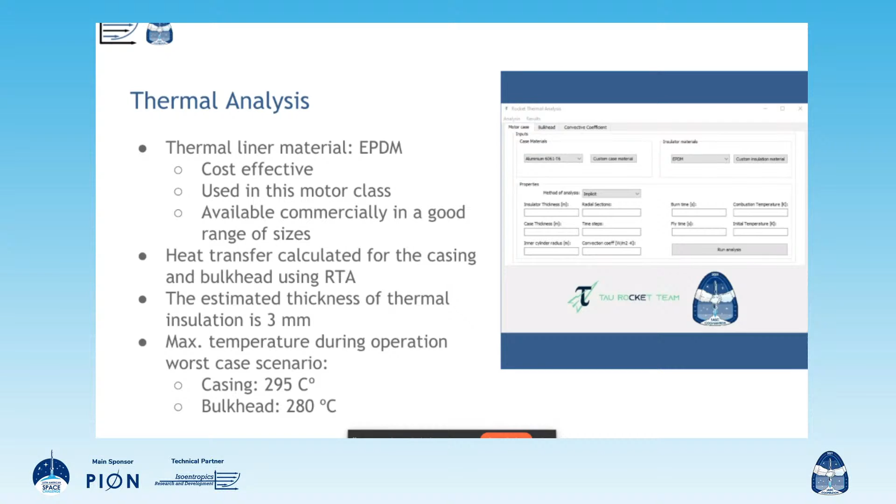So Felipe, you can go on please. So this is the final temperature of the case for multiple thicknesses that we ran the simulations with RTA. So please go on.

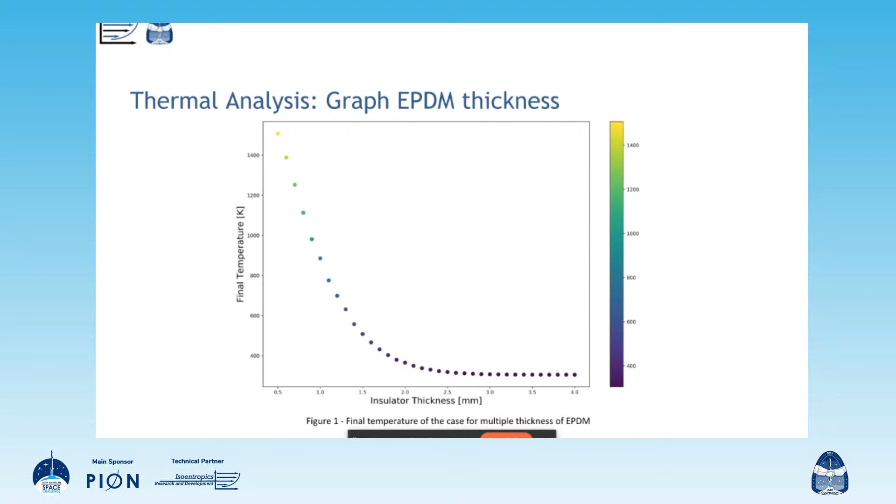And this is the temperature at coasting phase. You see that we are in accordance with the spec when we simulate that experimentally. So thank you all.

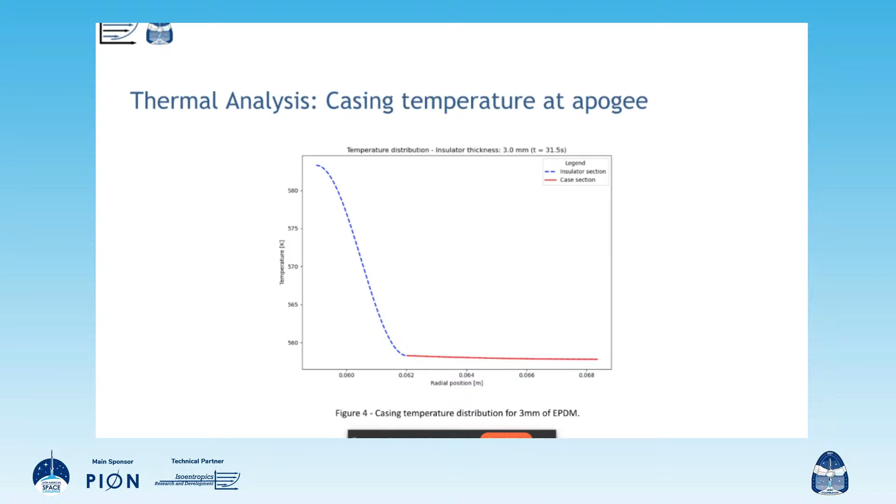Good evening, yes everyone, thank you Andres. Sorry, you can speak now. Good evening, everyone. I am Correa, and I'm going to present the propellant manufacturing and burn rate.

After that, the grains of sorbitol and potassium nitrate will be sieved and homogenized to ensure a better quality. This mixture will be cooked with temperature monitoring, and then it should be placed in the molds of the grains.

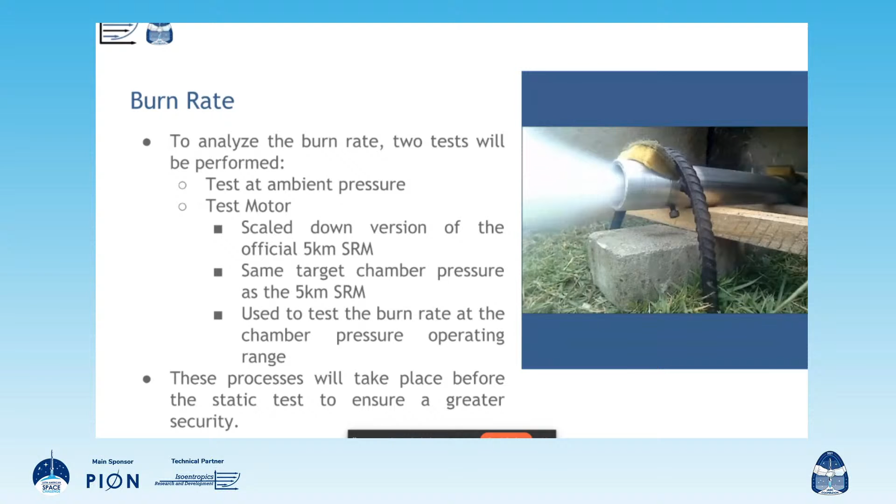These processes will take place before the static test to ensure greater security. Yes, great, Adam. And Christopher, you can talk now.

Good evening. I am Christopher Deep, and I will talk about the inhibitor a little. So our main option, it's on the inhibitor.

We go in with the fiberglass because it has the best characteristics for what we want, and especially having great resistance to heat. Fiberglass is a bit boring to work with and do the process, but because it's well documented, it brings more reliability when using it.

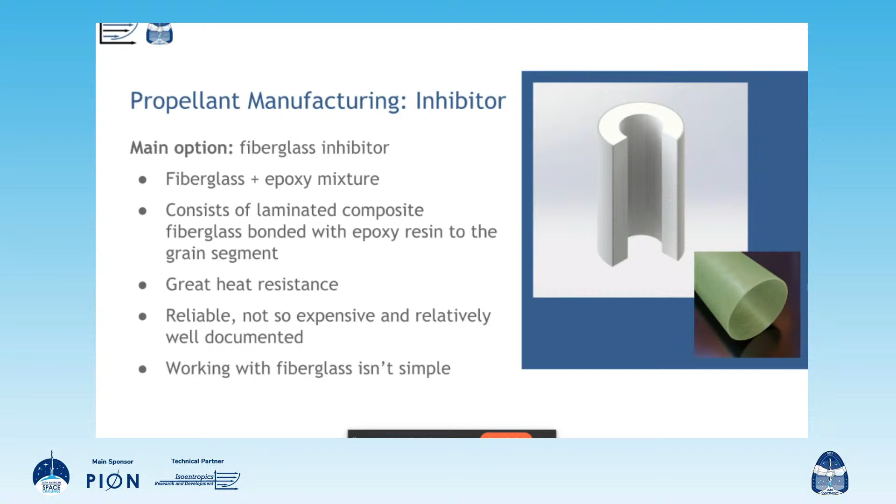The next option: so we have two alternative options using a PVC tube for the inhibition, with an internal layer which doesn't need to integrate the grain and the inhibitor. It would make it easier to prepare the grains since it already serves as their own mold.

But unfortunately, because of the tubes already found, we saw that we would need to work on the outside diameter. So we didn't know how the behavior would be like. So we left it aside because we need to do some testing with it. So at the moment, we keep the fiberglass.

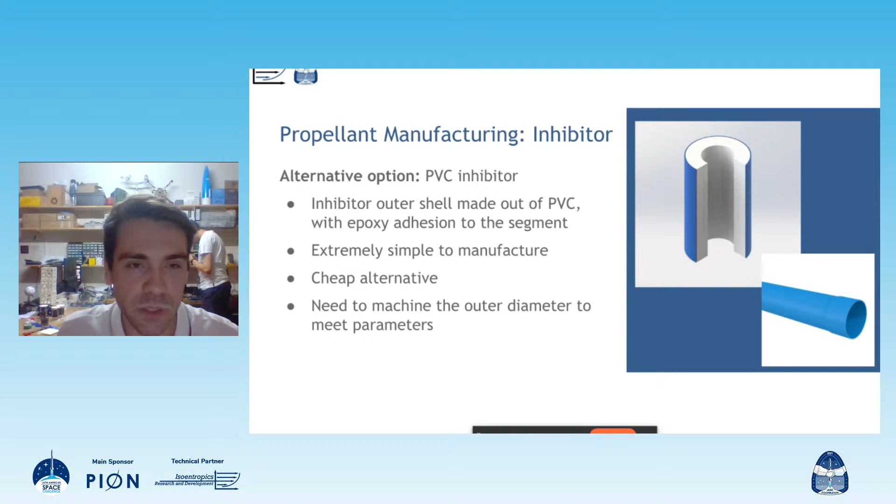Christopher, whoever is sharing the screen, please go back to the PVC alternative option. Okay guys, I know this is an alternative option, but I think you have to go with the fiberglass, so please focus on the fiberglass part. If something happens and fiberglass is not good to go, we can go for another type of inhibitor, but I'm not comfortable with PVC as an inhibitor, because normally you have a lot of work sanding inside the tube for adhesion. I think you guys will have to work a lot. I don't know if it's a good option for a backup plan, but it's a backup plan, so it's okay. Let's go with the fiberglass.

I think this is going to be something very interesting, and I'm very anxious to go to the test site for the first hot fire test as soon as possible.

Finishing my talk here, I'm very happy and very glad to have you guys work on this project. The propulsion system is very complex and I think you did great work. There is no consideration on my part for the propulsion system. I think this is going to be the most energetic propulsion system from Latin America made by a student group, so you guys are going to make history, it's going to be a record. This motor is very, very complex and you guys did great work. I have no words, I'm very glad.

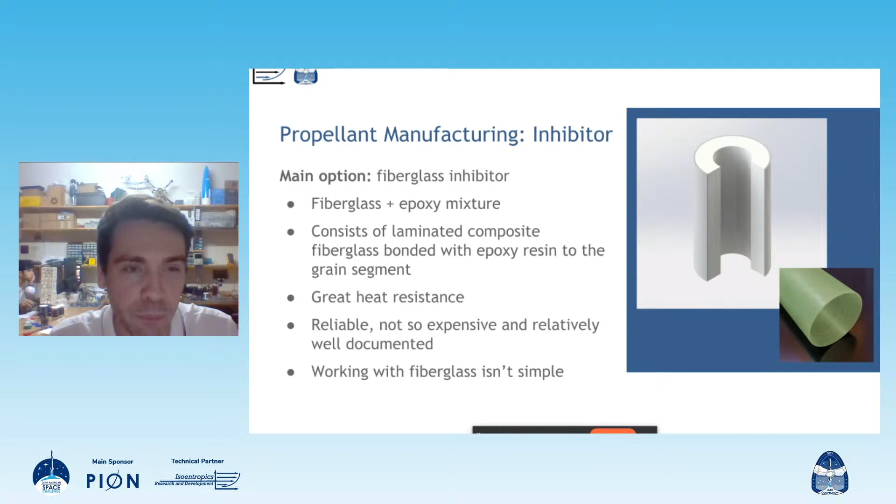I just want to say to Felipe Bogart and Igor Novs - I know Igor is not here tonight - the pressure is a bit high, it's 5.5 megapascal. I'm not comfortable with this kind of pressure. I prefer to use something between 500 to 600 psi, but I think we are good to go with 800 psi, and I think this is going to be a huge motor.

The sound of this motor will be impressive. I'm very anxious to go to the test site to watch the test. So congratulations guys, we don't have any kind of word on the propulsion system. So we are done for the preliminary design review with all systems. We have a lot of homework to do, but for New Year's Eve, you guys are go. You can sleep well tonight, and you guys did amazing work.

Congratulations for the dedication, the time, and the motivation to do this project. I think in February or March we will announce something very interesting for this project. Nowadays this is a little bit secret, but I think you guys will like it a lot. So congratulations, Vinicius. From LASC's part, that's it.